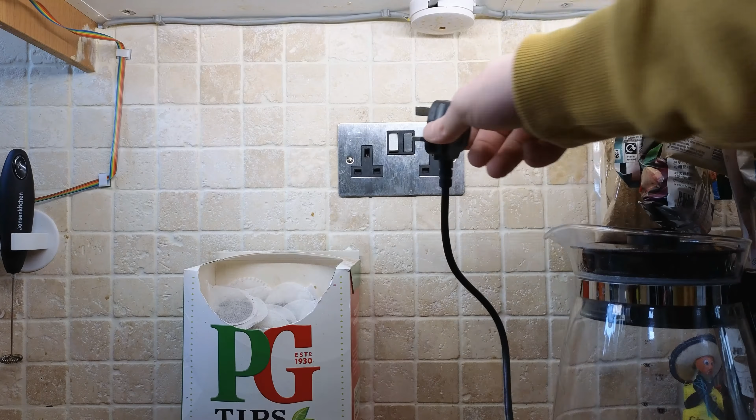What is smart? Is this smart? How about this? Am I smart? Unlike the majority of people, I would personally consider clean running water and electricity in every room to be pretty darn smart, but most people aren't satisfied until you slap a 4-letter word onto it. I of course mean Wi-Fi. Regular bin, smart bin. Regular rice, smart rice. Regular bike, smart bike. Regular person, smart person.

On this episode of Mellow Labs, I wanted to make a smart faucet with adjustable heat temperature, but somehow my landlord found out about it and she said that if I touch any of the plumbing, she'll slap me with an eviction notice. So instead, we'll be converting our door lock to a smart lock. And not just by writing Wi-Fi on it.

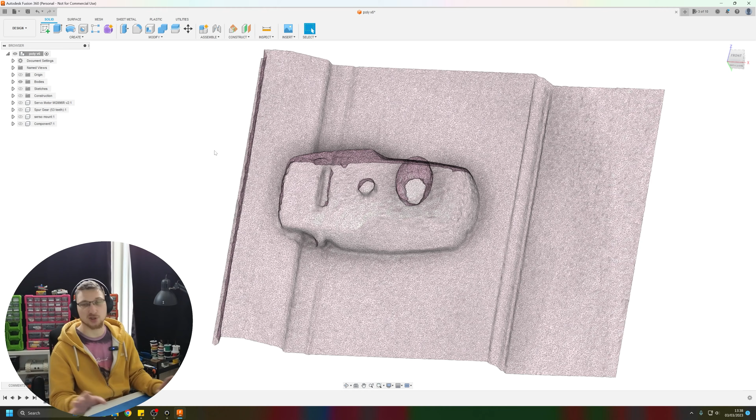Okay, so let's bring this into Fusion and we can play around with it there. Here we are inside of Fusion. I've already imported my mesh. I've already designed stuff. I'll just walk you through what I did. First of all, I imported the servo that I'll be using. I'm using the largest servos I have just because I think it needs that extra amount of strength just to be able to open the door.

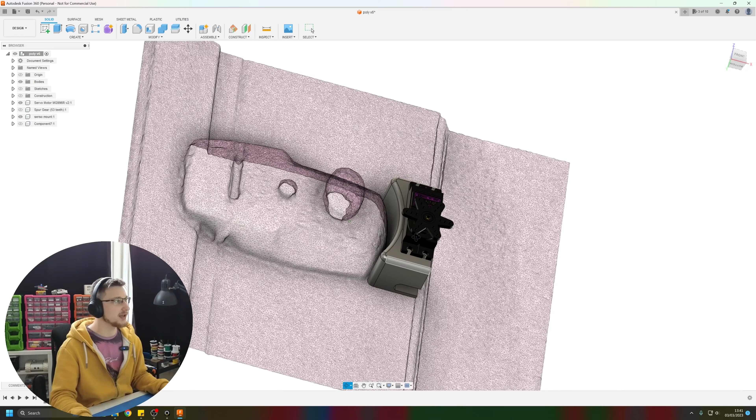This is a prototype version just for me to print out and see whether it actually works. This is why it looks so rough and I don't have a place for a microcontroller yet. We'll add all that in the next iteration if this works properly. From there, I just designed the gears that interact with each other. If I turn off this, you can see this just has a slot for the knob to fit into, and the other one just has a cutout for the servo arm to fit into, and then I can just screw it in from the bottom. Let's get these rough designs printed out and see if it actually works.

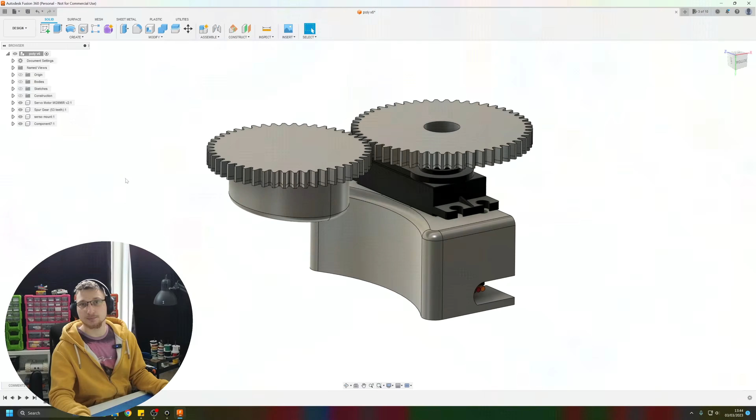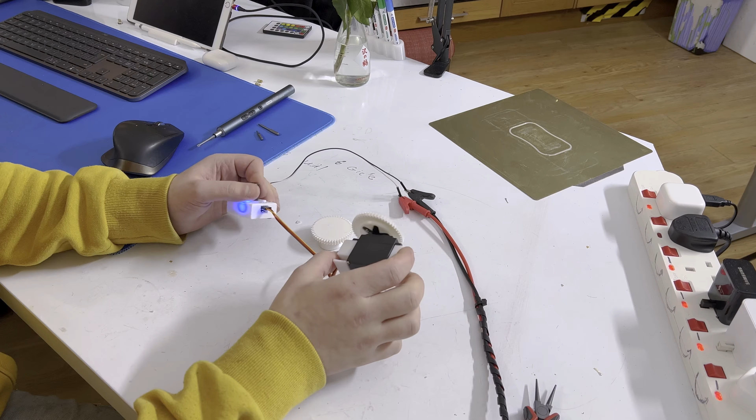And with that, we have everything we need to get started. I've got it assembled, the servo works fine, everything fits together nicely. Let's go and put it on the door. That should fit there, and that should fit there. And that's actually like a perfect fit. I'm impressed. Right, let's attach this to the door using my favorite method, hot glue.

I'm using hot glue because it's not permanent. I can remove it easily with like isopropyl alcohol and it won't leave any marks. Let's give that a minute to cool down. Let's plug it back into my servo tester. That seems pretty good. I'm not gonna lie, that's actually pretty decent.

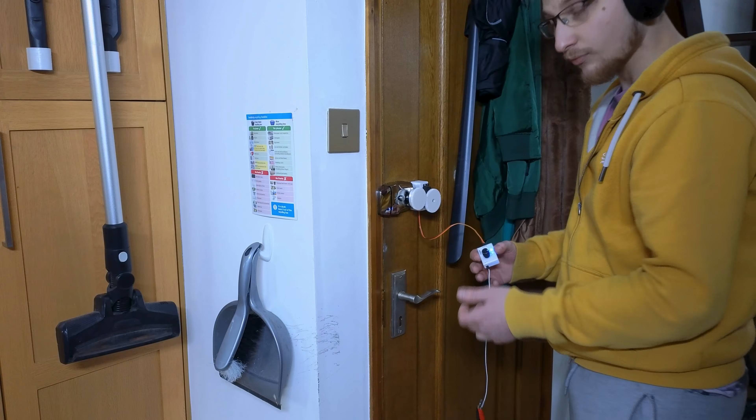I wanna see if I can still use the key. Yeah, it works separately, it works with it. You know what? Yeah, that works much better than I expected it to. So let's go and make a version 2 with a microcontroller and everything. I have to remove this version first. I'll use hot glue. It's easy to remove, he said.

Version 2 is hot off the printer, so let's put it together. First, I'm putting screw inserts into the holes. I didn't want to put screws directly into the plastic. It didn't hold the servo in very well on the previous iteration.

That's hot. That was the dumbest shit I've done yet. What the hell was I thinking? I've got a ring on my finger now, and not in a good way.

As always, I'm using a D1 Mini to control everything, and that fits in right here. But first, I need to solder on the connections from the servo. I'm actually going to reuse the gears I made for the prototype version because, well, I already got the spacing right and they work. Why should I waste more filament? And that's it, it's all put together.

Now I just have to put some code on it, and I will of course be using ESPHome because it integrates with Home Assistant, so mwah. I'll see you after that's done. Oh, good morning. Did you know that programming, hold on, let me just... Did you know setting up servos inside of Home Assistant is really annoying? You have to do like 3 different things.

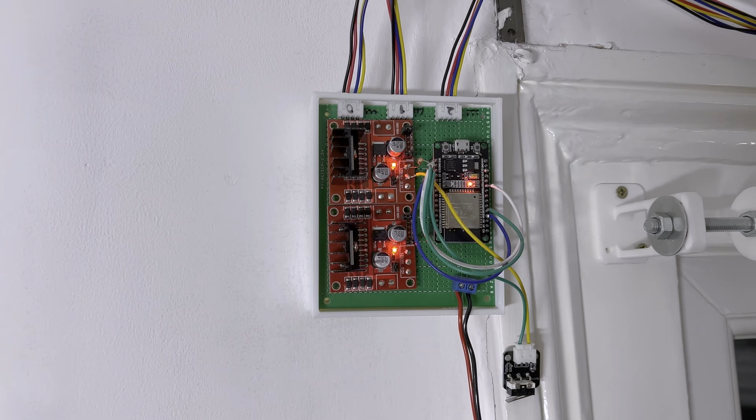So now it's a little bit more complicated. We've got a USB port that goes into the voltage regulator, which then goes to the D1 Mini and the servo. And I've been testing it, and it seems to be doing okay. It hasn't died yet. I had to change the design of the servo holder. It now has a place to put all the new components, and it looks a little bit more open source. It's very reminiscent of the controller for my curtains. So, like before, I need to add in the heat inserts, and hopefully not burn my finger this time.

So the standoffs I got are technically for injection molding, which I didn't know about. So they don't go into 3D prints correctly. They like to pull the plastic inside, and they gunk up the threads, and then you can't put a screw in. I find if you just remove one of the textured sides, it helps a lot. CNC Kitchen has a great video on the different kinds of heat insert threads you can get. Don't buy these ones. These rank by far as the worst ones on all of the lists. But I'm currently going through a bit of a shortage of money, so I want to use these up.

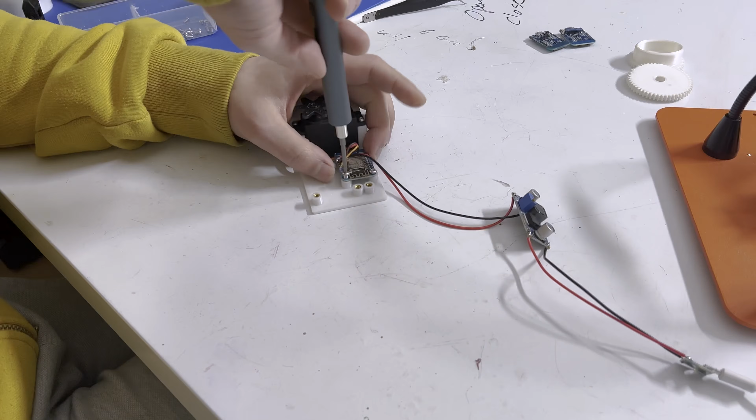Good news, I have successfully resisted the urge to poke a very, very hot thing. It still works. Okay. Let's get it installed. Right, it's finally installed. Open. Close. It works! And it didn't burn out yet. Do you feel hot? Do you feel like you're gonna burn out? It doesn't feel like it's gonna overheat, so that's good. I guess time will tell.

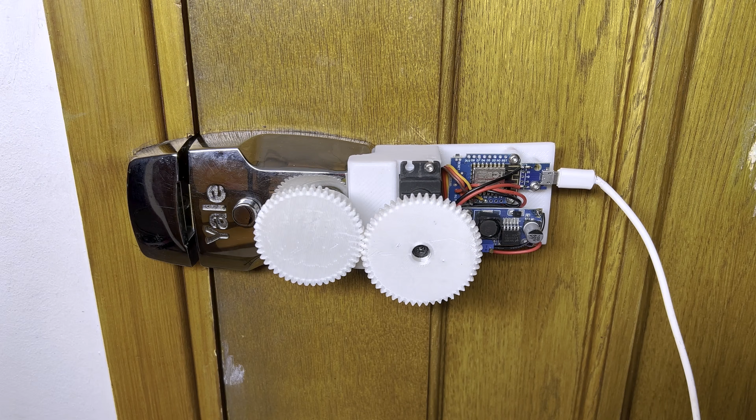I swear, if that broke just then, that would have been hilarious.